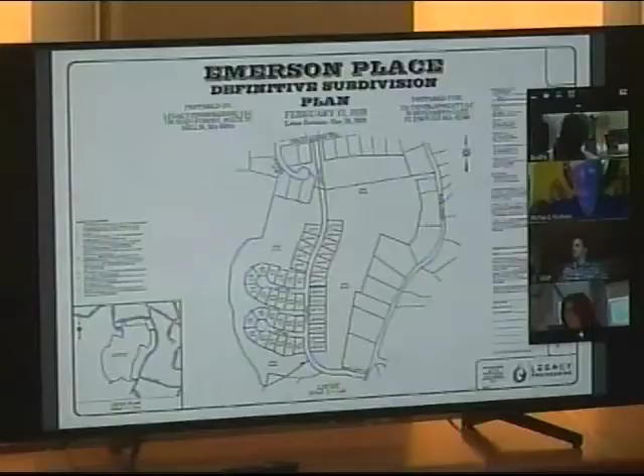Out is how do I get everybody's picture at once? Okay, we are live. Oh, hi.

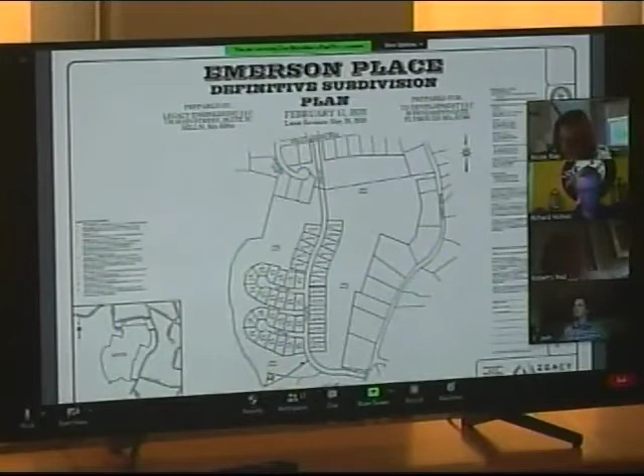Sorry about that. Town of Millis Office of the Planning Board notice of public hearing in accordance with the provisions of Chapter 41, Section 81T and 81U, Mass General Laws. The Planning Board will hold a public hearing Tuesday, May 26th, 2020 at 7:30 p.m. via Zoom platform on the application for approval of definitive plan submitted by TD Development, LLC, Robert Fox, 38 Benjamin's

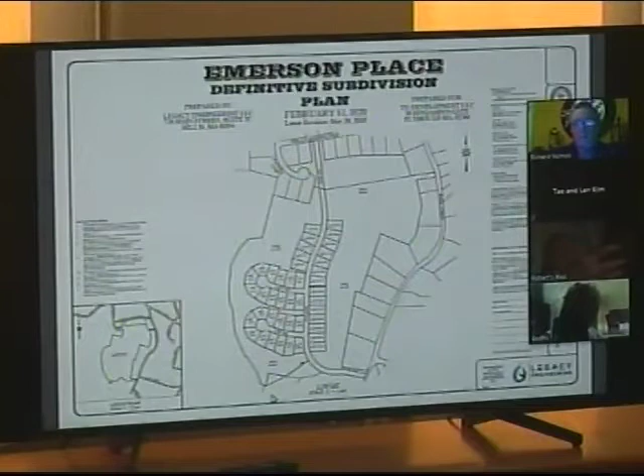Gate, Plymouth, Massachusetts, 02360, for construction of a proposed 43-lot single-family residential development at 13 Rolling Meadow Drive, parcel 15-66, Ridge Street, several parcels, 20-25, 20-26, 20-28, 20-27, and 23-04, and a portion of 84 Ridge Street, parcel 20-53, Millis, Mass. Property is owned by TD Development, LLC, GJ&K, LLC, Ridge Street Trust, Peter Harkovitz, Joseph Hawks, and Amy Farina.

A copy of the application and plan is on file in the office of the town clerk and on the planning board's webpage. Any person interested or wishing to be heard on the application should appear at the time and place designated. Richard Nichols, Chair.

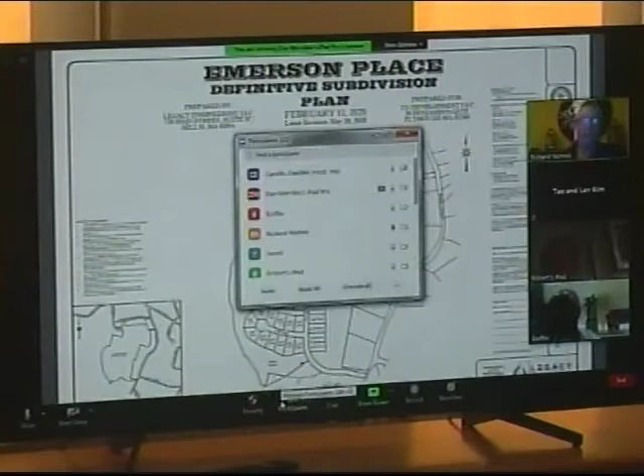All right, thank you. I just also want to let people know that there were some emails sent from some of the residents in the affected area asking for possible sidewalks on Ridge Street, which was one of the things discussed that the developer might be willing to do in exchange for not having to build them on site in the development. So there were several emails received, and we just wanted to make sure that was noted, that we did see them and we also did read them. So, Dan, if you wanted to go ahead.

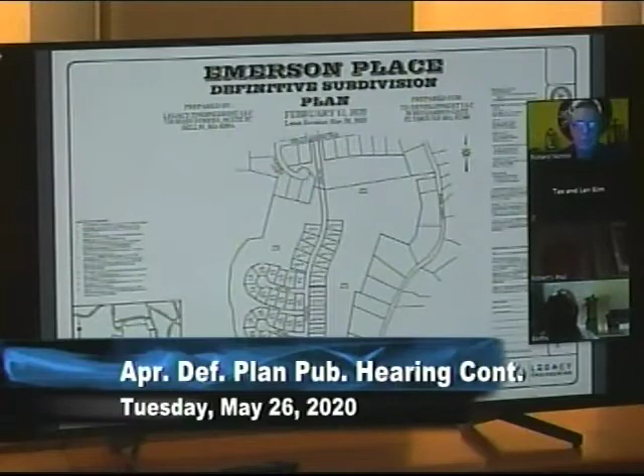Thank you, Mr. Chairman, members of the board. Dan Merrikin with Legacy Engineering here on behalf of the applicant. Tonight, my goal is to do two things: give you a quick overview of the changes we've made. We've submitted a complete set of revised drawings, a response letter and a new drainage report. Beta is in the process of reviewing that information, so we don't have a review in hand, but I'm going to go over some highlights with you. And the second thing is to go through the waiver requests so that we can talk about each of them.

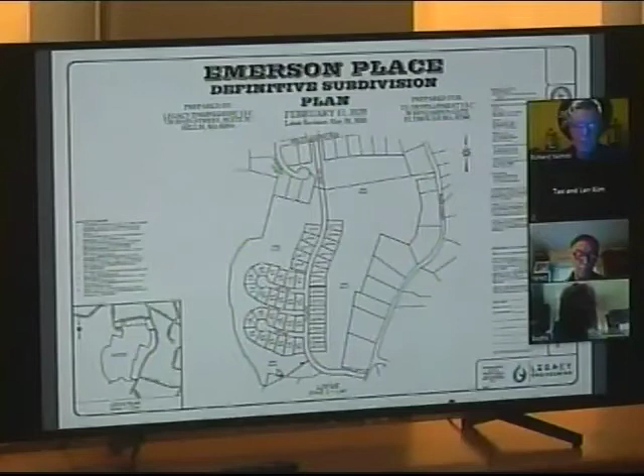So the plan design has not changed very significantly. There's only one change really. Can everyone see a red dot on the screen? This is a new feature of Zoom. Yep. Okay, so there were two stormwater basins down here just south of June Way. We've eliminated them in favor of making the stormwater basin between April Way and June Way larger. So we simplified the drainage design a little bit. Beyond that, it's a lot of notes, more detailed information on the three culvert crossings under the existing cart paths that lead in from Ridge Street and Rolling Meadow. And I could just review that.

Taking a little while to load these sheets up. Sorry for that slow feed here. We're getting to it.

Okay, so this is the north end coming in off Rolling Meadow. There's an existing cart path that meanders in from the end of Paddock, and it comes right down through here. There's an existing piped crossing for the wetland area. You can see we have this very narrow wetland area, and a cart path comes right through here. So we're coming through that same area, and as part of our work, we're going to remove the piped crossing and replace it with a box culvert, which is what conservation commissions like to see, an effort to restore what was once an original stream bed to a stream bed-like condition.

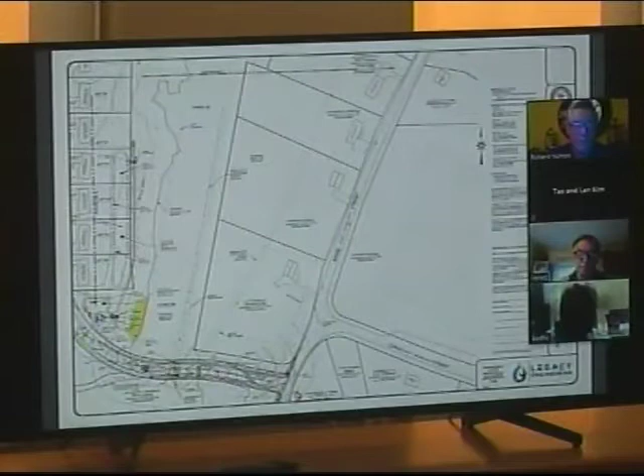And we're doing the same thing on the south side. We have an existing cart path that comes in off of Ridge and goes right along through here and all the way up into the property. And our road is right on top of that cart path. So you can see that in this area here, these are old farmers' ditches.

There is presently a culvert underneath those cart paths. It looks to be an old stone culvert. So as part of our work, we're going to put a concrete open bottom box culvert in each of those two crossings to, again, restore those two areas to a stream bed-like condition. And that's done and designed in accordance with a document produced by the Commonwealth of Massachusetts to specifically provide guidance on how to accommodate stream crossings with driveways and roads.

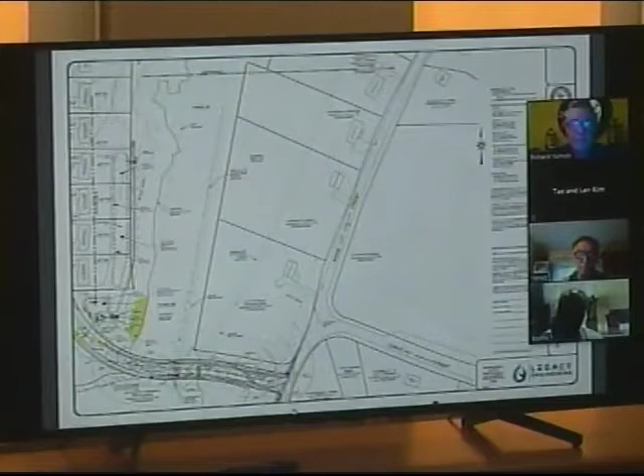Dan, so I'm reading on the plan right now that says that's an intermittent stream. So basically, that is seasonal, correct? Well, we have documentation that shows all three of these are seasonal. There are three streams. Let me go back here to the overview.

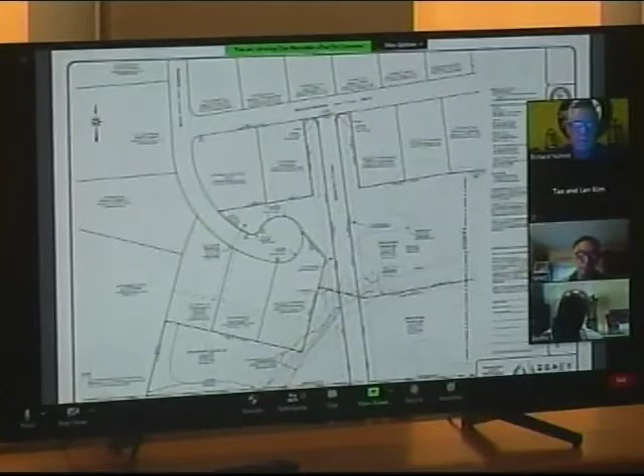Okay, so there are three streams on the site. On the south side, there's these two. They're all dug stream channels, dug ditches that I'm sure go back to the days when this property was farmed. The one that I'm highlighting now is depicted on a USGS map as intermittent, so it's presumed to be intermittent. This one, which is closest to Ridge Street, is depicted on a USGS map as perennial, so it starts off with an initial presumption that it's perennial, but we have documented it on many occasions dry as a bone and not flowing at all.

And we have submitted some of that documentation to the Conservation Commission, and we're going to be submitting more. Basically, once you document that it's not flowing on any 4 days in a 12-month period, it becomes an intermittent stream. And we have the same documentation for this northerly channel. So two of the channels start off with a presumption that they're perennial, but through field documentation and field evidence, they become intermittent. So it's not like you're putting a culvert in for like the Bogastow Brook. These come and go with the seasons.

Yeah, and these channels are maybe 6 or 7 feet wide at the top. At the bottom, they're not very big. It's not Bogastow Brook, and they are definitely dry during periods of the year. It depends on the stream. The two southerly channels seem to dry up quite frequently. I've been up and down them many times when there's no water in them at all. The northerly channel dries up less frequently, but we do have the documentation that shows that as being intermittent. All right, great, thank you.

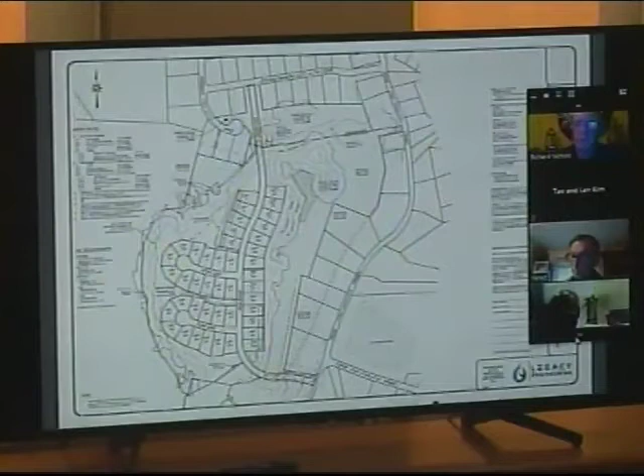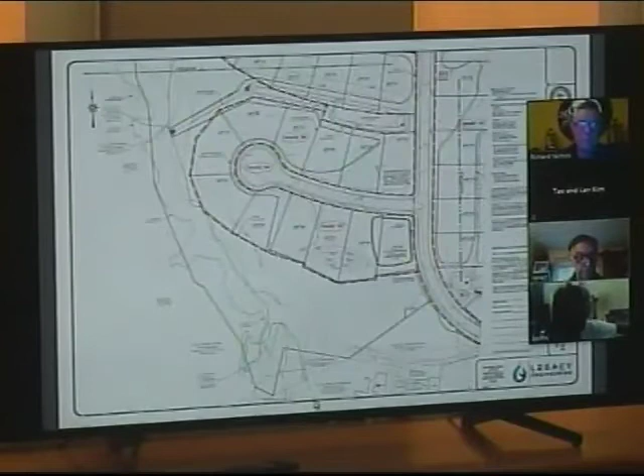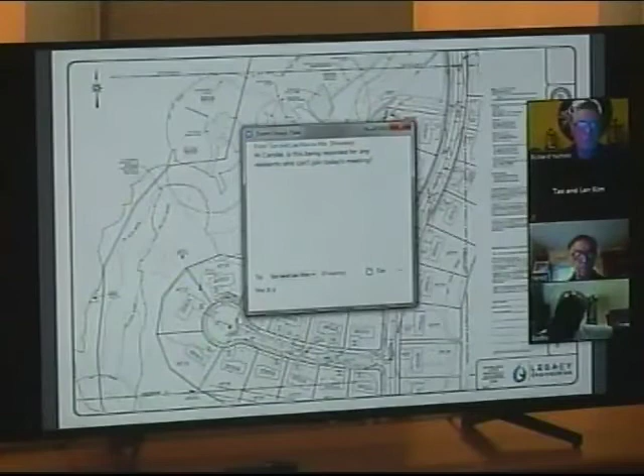Number 3, to allow less than 7 feet of cover over a sewer line. So let me pull up some profiles here. We have gravity sewer coming in from Ridge Street. It's about 14 feet down in Ridge Street, which is nice because it allows us to extend gravity sewer through a lot of the projects. This is something that we're in front of the select board for. The select board issues sewer and water extension permits, and they have their own peer review consultant that reviews the sewer and water system design on their behalf for those permits.

And when we come in, so this is the main road through the project, which is May Road. This is the Ridge Street end. So you can see the existing sewer manhole here down at Ridge Street is about 14 feet down, and we're coming in at basically minimum slope, 0.5% on the sewer line. And there are places where we cannot accommodate 7 feet of cover over the sewer without doing a lot of filling, particularly at the ends. So this is down as you get towards the last few houses on May Road, heading towards Rolling Meadow. You can see here that we have an area where we have less than 7 feet of cover over the sewer.

We could change that out and replace it with low pressure sewer, but it's our view that it's preferable to have the gravity sewer wherever you can get it. So those sewer mains have about 4 feet of cover. It's enough to get a service to the adjacent homes. It's certainly something that is reasonable to construct. It is more ideal. Go ahead.

On that one, Dan, sorry. With that data here, I personally don't have an issue with getting down to 4 feet, because that's below frost. I'd weigh in on what Jim had to say, but I don't see an issue with that. And we prefer gravity, because gravity doesn't break. Right. Does Melissa want to weigh in on that at all? I'm not sure if she's here yet. She was in. Okay, go ahead, Melissa. Yep. Hello.

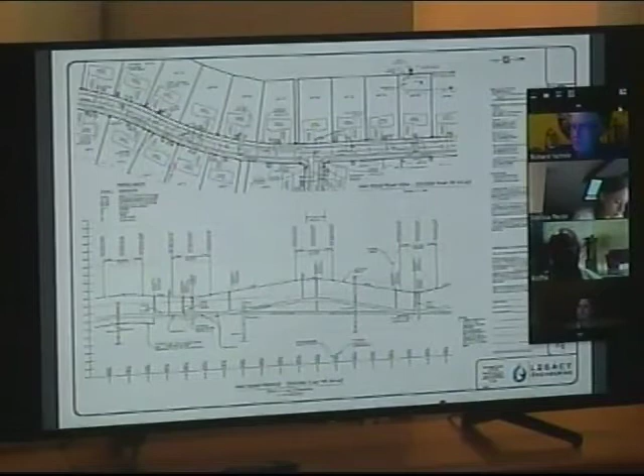The fourth waiver request is something that you see from me on every subdivision we do. Your regulations are a little outdated in how stormwater basins are supposed to be designed. They call for sloped bottoms with a low flow channel in the middle. Stormwater basins now are designed predominantly with flat bottoms to allow as much water to infiltrate as possible. Basically, the flatter the bottom of the basin, the better, because the water all spreads out around the entire basin bottom and can soak in the ground instead of being collected in one corner of the basin. So that is a waiver request to have flat bottoms, and this is a design practice that is recommended by Mass DEP as part of their stormwater management standards.

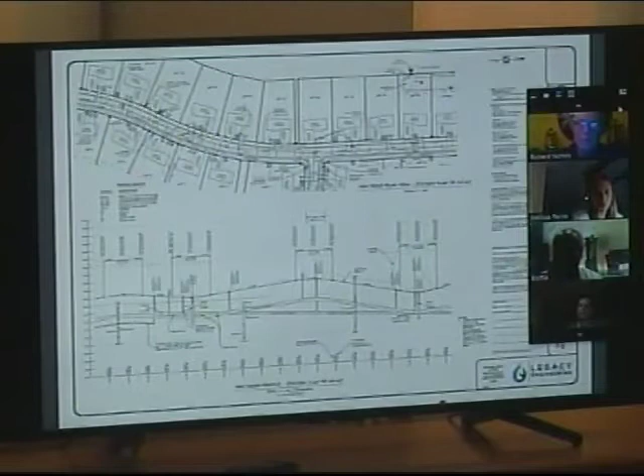The next one would be to allow streetlights to be only located at intersections. And I did want to get some feedback from the board. What we've done in the past here is we've only put a streetlight at the main intersections. So we'd have one at the main road and Rolling Meadow, at the main road and Ridge, and also at the main road at its intersection with June Way and April Way.

So the question for the board is that coming in either end, there's a pretty good distance of road where there are no homes on it. Coming in from Rolling Meadow, there's about 700 feet of road where we're coming in and we're crossing the wetlands and we're basically just traveling through a wooded area. And on the other end, we have...

Dan, hey, could you pull that up so the people at home can see? I kind of know what you're talking about, but it'd be good if... That's this here. I'm going to highlight it in a minute. Okay. On the other end, it's the same thing. We have about 700 feet coming in where we don't have any homes along the road.

So the question for the board is, in this area, right through here, where we're going to have a light at the intersection, and then we're going to start having post lights at the end of every driveway here. But in this 700 feet, do you want me to have a couple of streetlights? I was thinking that maybe we'd add a streetlight just before the crossing and then just after the crossing, and that would space them out every 300 feet or so, through that first 700 feet.

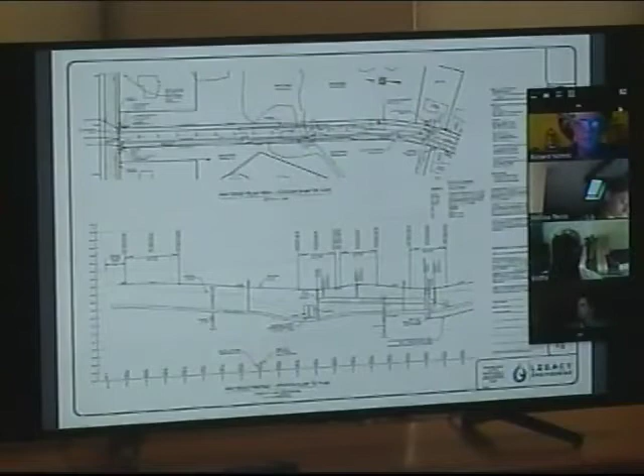The next one is you have a provision which basically says that try to put stormwater basins on single lots. This is an open space subdivision, so you can see that in trying to balance the open space requirements, we need to put some of these stormwater basins on the backs of lots because we can't slide them all into the open space. So it results in stormwater basins being located across several lots. We do this quite frequently.

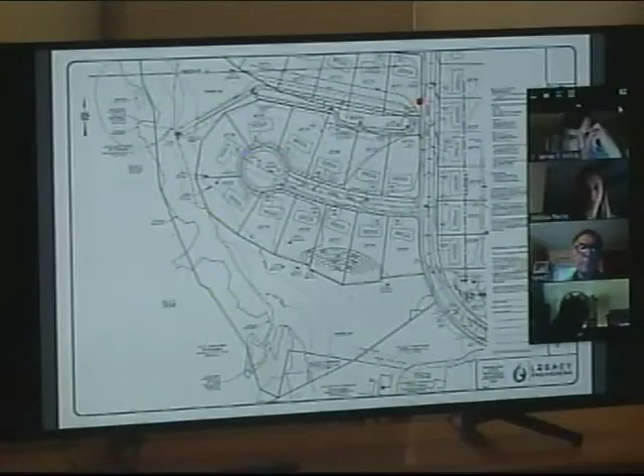We have an easement in place that allows for that, but this is stormwater basin 1, for example, which is half in the open space and half in 5 lots. Stormwater basin 2 is a very similar setup where we have, this is the stormwater basin, and it's mostly in the open space, but it also gets into the very back of some of these lots along April Way.

And then stormwater basin 4, which used to be stormwater basin 6, is only capturing runoff from the yard areas of the adjacent homes. It's not actually picking up any street runoff. So this basin here spans across the backs of 4 lots, and it's only there to pick up the yard runoff from those 4 lots. So that's the nature of that waiver request. Again, another waiver that we see fairly often, so that we can spread out these stormwater basins and make them as big and shallow as possible.

The 7th request is to allow stormwater piping to be HDPE instead of concrete. This is something that we did talk about, I think, at the beginning in our initial presentation. People used to install reinforced concrete pipe for drain lines. That used to be the standard practice. Now, it's much more common to see high-density polyethylene pipe in all applications for drainage piping. So we are asking a waiver to allow us to use HDPE pipe throughout the subdivision instead of RCP pipe.

I don't know if Jim or Melissa wanted to weigh in on that at all. Melissa, do you have any comments on that, or we could wait till the end? I don't have any comments on it this time. Not a big issue. It's something we'll have to review. I'm not opposed to it, but I'll review it with Melissa ahead of time. Okay.

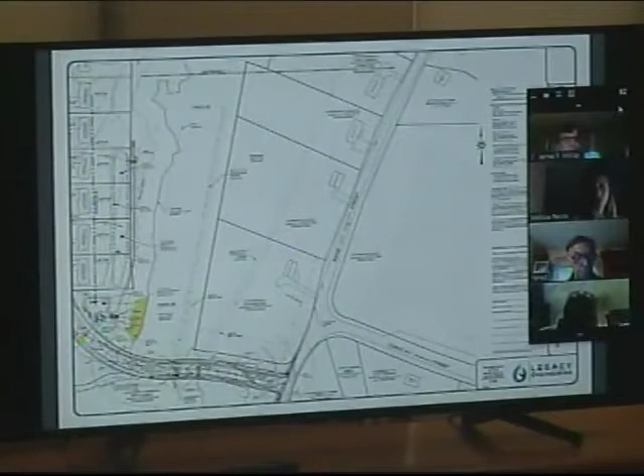We do this in order to basically minimize the amount of earthwork that's necessary. So this is the beginning of May Road, coming in off a rolling meadow. And at our stream crossing here, this is our box culvert that we're going to install. Presently there's just a 24-inch pipe through there. We're going to put in I think it's a 9-foot wide box culvert. And we have a pair of catch basins right here at the low spots.

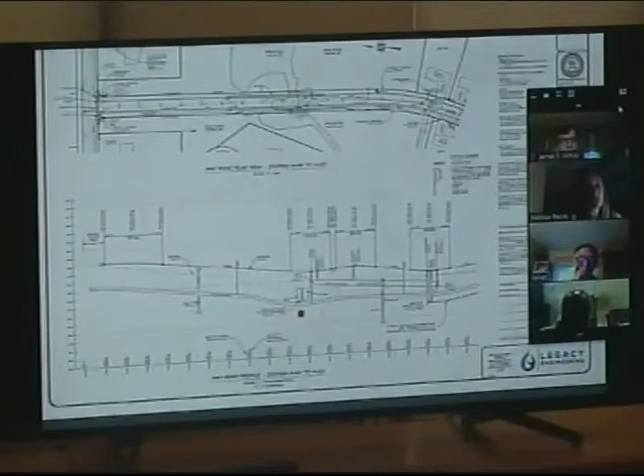And then we're picking up that runoff and we're draining it all the way back along the road and out through the open space into stormwater basin 1. That allows us to take all this runoff from the beginning part of this road, and instead of discharging it into the wetland system, we can discharge it into our stormwater basin where it gets treatment, it gets infiltration, and then it overflows out towards the wetland area.

In order to minimize cuts and fills, we basically design our drainage system to have basically the minimum amount of cover that you need over a drain line. For the purposes of structural stability, these drain pipes can have as little as 12 inches of cover. That's not the issue. The issue is more being able to get a catch basin rim or a drain manhole frame and cover and a flat top manhole structure. You need the top of the pipe to be down around 2 feet, 2.5 feet. And that's what we've done here in a couple of locations, basically to minimize cuts and fills.

Rather than bringing in another 2 feet of fill across this wetland crossing, we design it for basically the minimum practical depths of cover that we need to be able to get our pipes in the ground and get the water collected and discharged to our stormwater basin. And these pipes are all designed to accommodate the 100-year storm. A lot of these catch basins are in little bellies in the road, so that actually contributes to being able to get more water into the catch basin grates.

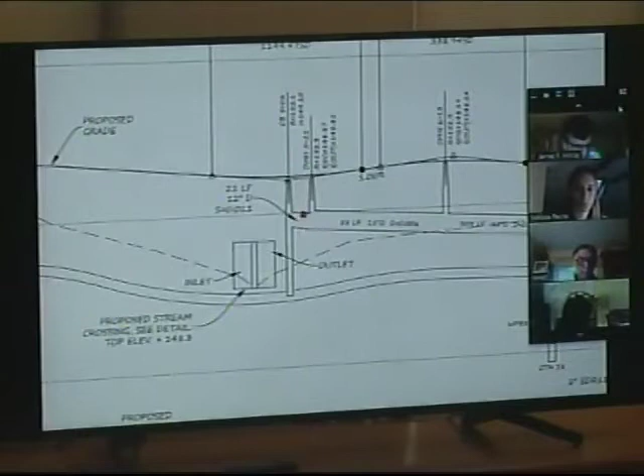So that's why, and you can see if I zoom in on here, we're going from 12-inch laterals on the catch basins here to 15-inch main drain line, and we're matching inverts instead of matching crowns. So if we were to match crowns, we'd have to drop this drain line down 3 inches. But our HydroCAD analysis demonstrates that with matching inverts, everything functions fine, and it captures the flow that we need to capture, and it conveys it to our stormwater basin.

And one question for you. So you're matching the invert. Will any standing water be below 4 feet? Are we worried about freezing in those? No, these things don't hold standing water. I mean, the catch basins hold standing water. But because catch basins are so deep, you get down about 4.5 feet into the ground, and the ground's always 50, 55 degrees, summer or winter. So that basically brings the temperature of the water sitting in the catch basin to that temperature of the ground, and you rarely see any icing in a catch basin.

And the regulations actually allow catch basin pipes to only have 2.5 feet of cover. It's just the mainline piping. I'm not sure what the purpose of the regulation is, but we're only asking for the waiver for the main drain line cover. Okay, great. Thank you. So those are the waivers.

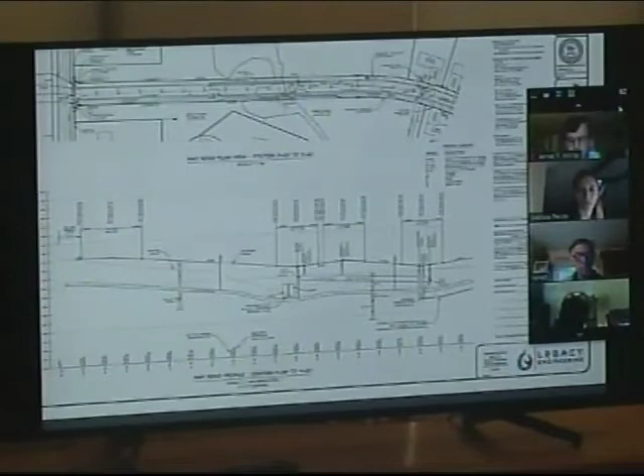All right. You want to talk about them now? Do you have anything else to present? Because I think what I wanted to do is run through everything at the end. Okay. No, that's what I have for you tonight. Okay. Beta is in the process of reviewing everything. I'll leave it to Melissa to let us know how long she thinks that might take. But after we finish our discussion tonight, we would be asking for a continuance until a time when Beta has their comments ready, and then we can reconvene and see what's left on the list to address. All right. So let's talk about the waivers.

Let me start first. So I want to put the sidewalks aside for a minute. I don't have an issue with the call boxes. That's a standard. The drainage cover, that makes sense to me 100%. Stormwater basin, that's something we've done in the last couple. The streetlights, I would say adding the couple in that long stretch makes some sense just to mark out the road.

The stormwater on multiple lots, it seems like it makes sense to me. That would be covered, Dan, in the HOA. So if there's any issues with that, maintenance of those, it doesn't matter because you have to have something in there to cover that. Yeah, we submitted a draft HOA. We create a homeowners association. All the 43 lots that are in the project would be in a homeowners association. They're responsible for two things.

They're responsible for maintenance of the open space, unless the town wants to own the open space, but I think prior discussions amongst the board was that they didn't want to. So the homeowners association will own the open space in the project, and they will also be responsible for maintaining all the drainage systems outside of the street layouts. Right. And I've submitted documents for you to forward to town counsel that creates that association. Okay.

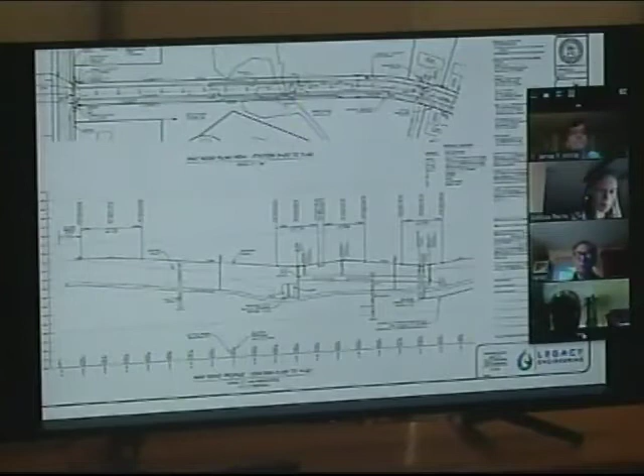But I believe that if we did not go with the extra lighting that Mr. American is proposing, that would be all right with me. Also, I would cite best practices for preserving dark skies on that as well. And also, I don't know if the developer is installing the post lighting, the welcome lights at each lot, but if so, is the BUG rating, the backlighting, the uplighting, glare, being taken into consideration? And those are my comments.

So on that one, Dan would have to weigh in. So historically, what we've done with these light posts, it's just a traditional residential lantern post with 60-watt bulbs in it, and it only illuminates a small area around it. They're probably 7 or 8 feet above ground. We have traditionally put one of those at the end of every driveway in the subdivision, and that provides a low level of illumination along all the roads and along sidewalks.

And that's fine. I mean, your point, Bob, is valid. I work in Weston. They do a lot of dark sky. The trade-off is that is a long stretch. There is a culvert there, but people have their headlights on also. So that is a valid point. Yeah. Does anyone else on the board have a thought on that? Yeah, again, I'm in favor of the 3 lights in the darkened area.

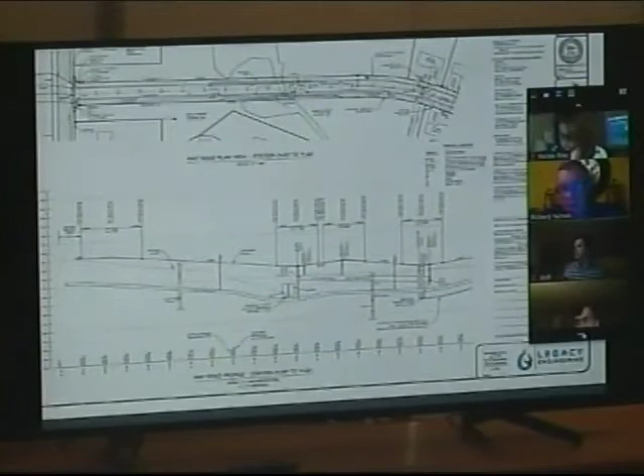Okay. Well, they have been willing to put up signage. They have already talked about doing lighting. Yes. And I'm not sure what else they would be able to do on that, that they haven't already taken care of.

Mr. Chairman, I think that the street lights at Ridge Street, that should help with the intersection that's in question. I'm sure that we could position the light, that it should help light up that intersection. I don't believe there's a light there. There isn't? No, I just looked on Google Earth. There's a pole near that intersection. There's no light on it.

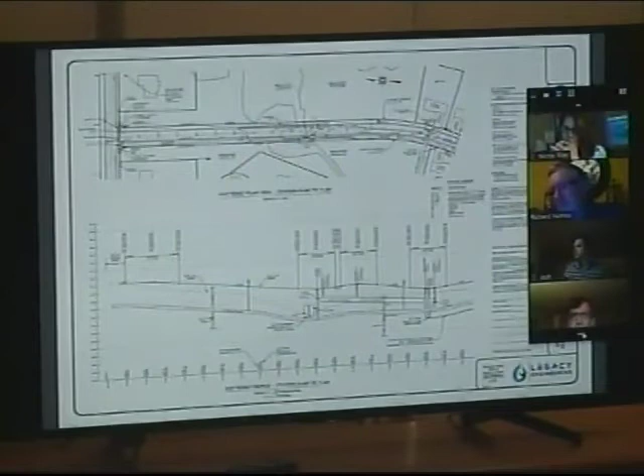Yep. And where the placing of the lights are, it doesn't make a difference with Eversource. We own the lights. We can get a permit if we choose to put light up at that intersection. We can further discuss that with Bob, myself, and Dan and Melissa. But we'll wait to discuss the sidewalks when you're ready about that.

Okay. I put out a note that specifies that the placement of the light poles at the intersections would be determined in the field, in conjunction with DPW. Yeah, that would be fine. I'm sure Dan would have taken his best shot at it, but I wouldn't be offended to have it reviewed in the field.

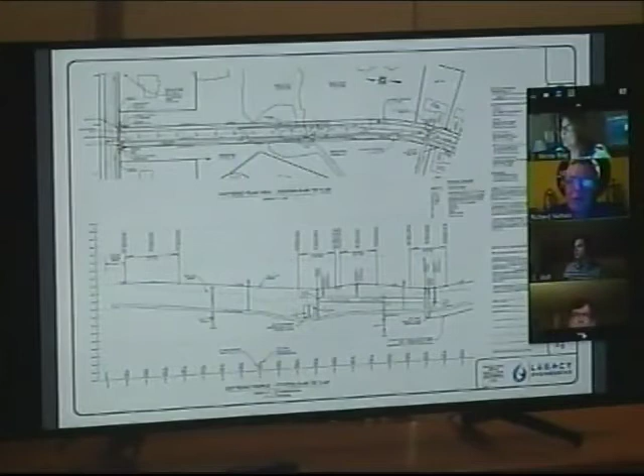So the only other question, that gets us down to the initial one, would be the sidewalk. On the sidewalk, you had 3,500 lineal feet of sidewalk that you would have had to put in. Yes. And your comment of putting in that amount of sidewalk in your location versus the Ridge Street location is slightly different, and I understand that. But I think part of the push has been to actually make sure that sidewalk goes in that area.

Whether you have to work with the town on the easements and the sidewalk committee or whatever, I think the emphasis would be to put a sidewalk in of 3,500 feet on Ridge Street. Maybe you could work in conjunction with the town. I'm not sure if Jim could reach out to them on that, or the select board. I would say the town should be willing to help, using our own sidewalk funds along with your developer. Well, I know it's not apples to apples. I understand. Yeah, you're getting into messy territory here.

One of the things I want to reiterate is there are several places along Ridge Street where you, being the town, do not own enough room to install a sidewalk, which means the selectmen now have to go do a taking. Right. So, do you have enough information to identify those areas to work with the select board? Well, no. Rich, you know better, you do this every day for a living.